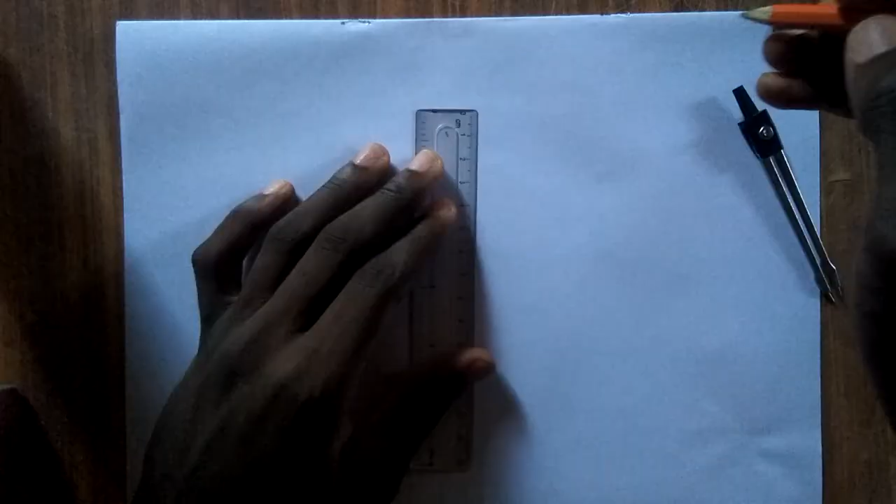So quickly, let's just say we're given a rectangle of size 6 and 11 centimeters respectively. We draw the major and minor axis from our horizontal and vertical components using 6 and 11 respectively.

First, draw a straight line, 6 centimeters, that's the vertical line. Locate the center of the line. Make sure your line is vertical upward. Then our next step is to draw 11 centimeters through it, so we have 5.5 at the middle.

We complete the rectangle after that. To complete it, we come to this side and draw a straight line of 6 centimeters. Note, you could also make use of a t-square to get a very accurate value, but since I'm a professional, I don't need to use the t-square, I can use my ruler. So now we're completing the rectangle.

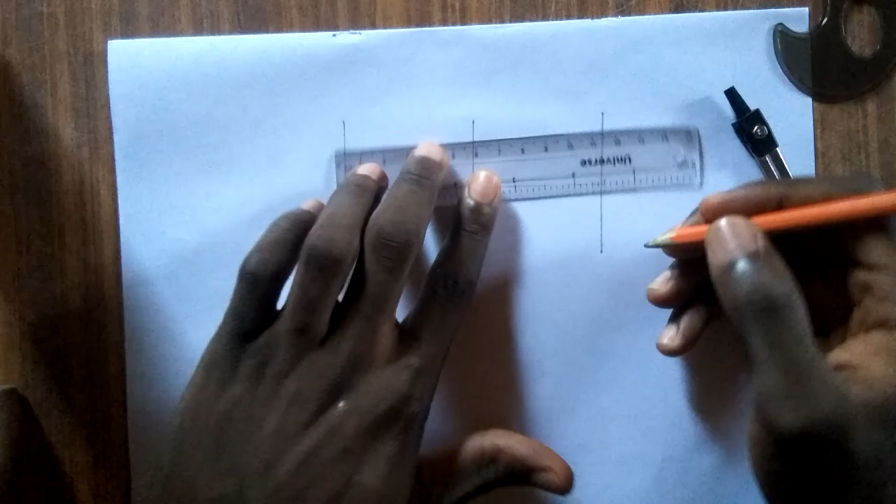So we are completing the rectangle, and we have this and also this.

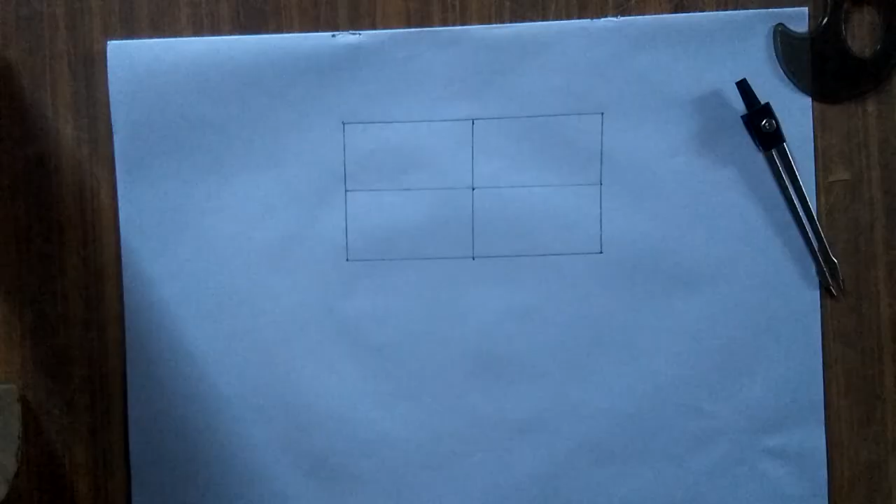Now that we have completed the rectangle, our next step is to call the first straight line AB and this upward line CD. We call the horizontal component AB and the vertical component CD. So we call this point E.

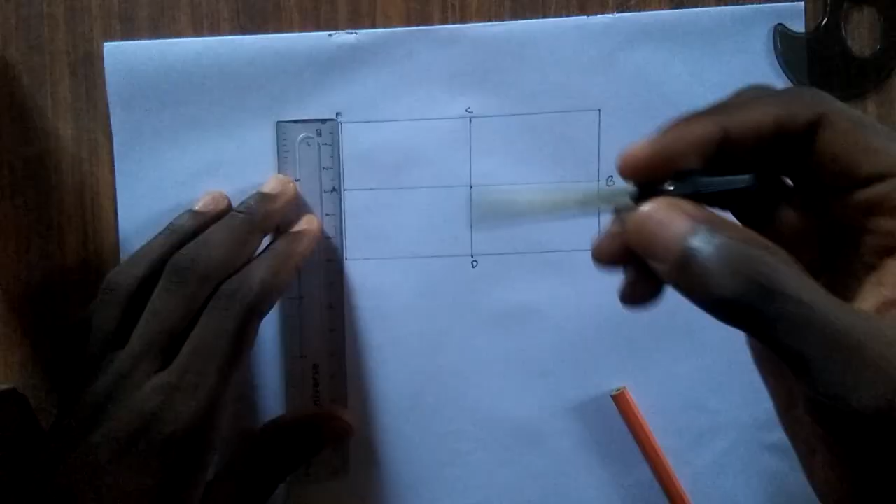After that, we now divide AE into a number of 4 equal parts. Since we know that EA is 3 centimeters, to divide it into 4 equal parts, each part will be around 0.7.

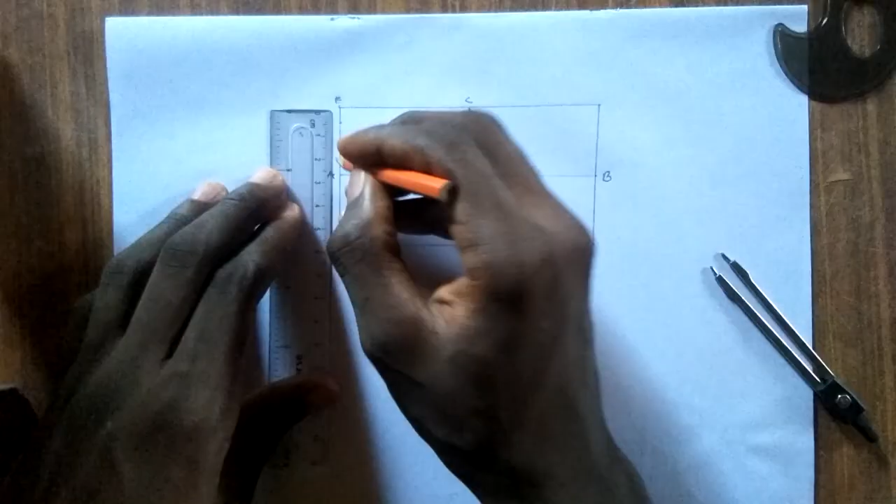We take 0.7 from our ruler and step it off 4 times on AE. So we have 1, now 2, adjusting it over here. So we have 1, and now we have 2, 3, and 4. Our 1 will be around here, then our 2 will be around there, and our 3 will be around there. After that, we number it 1, 2, and 3.

After that, we also call the center point where the vertical and horizontal components meet, center point O.

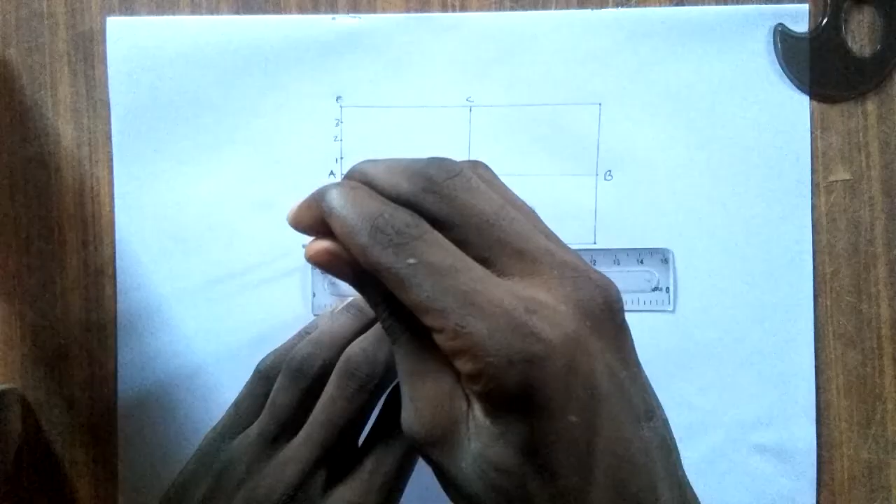Then we divide AO into a number of 4 equal parts. Since we know that AO is 5.5, each division will now be around 1.3, or 1.4 approximately.

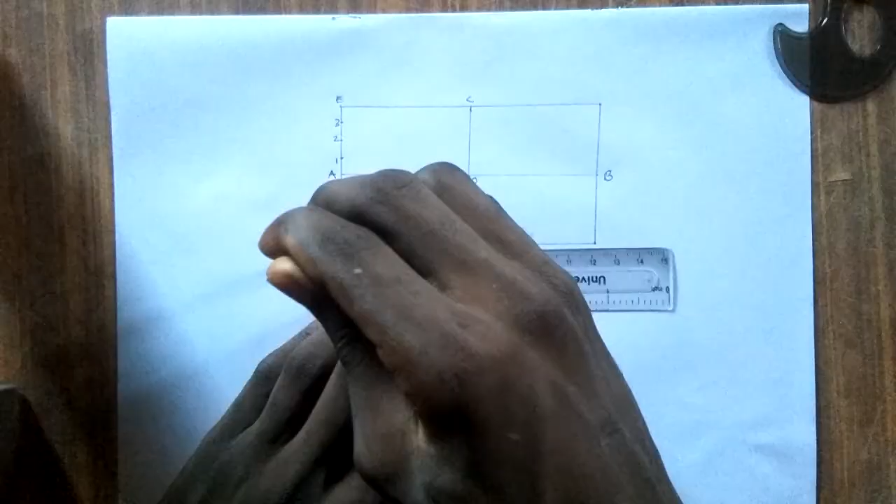So we take 1.4 from our ruler, and step it off 3 times. So we have 1, 2, and 3. We mark it 1, then 2, then 3.

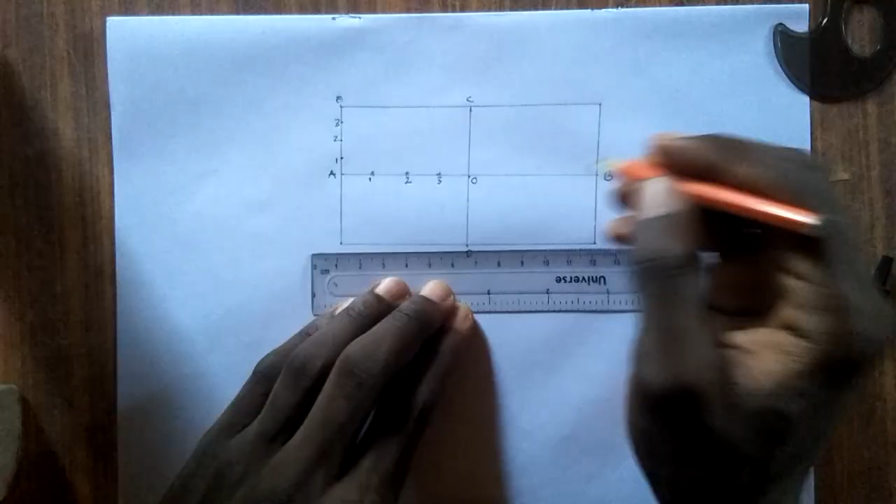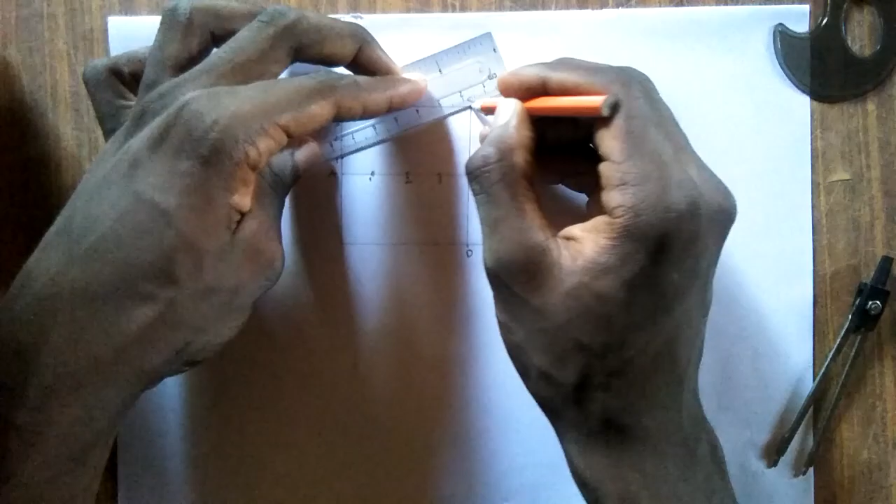After that, we now radiate lines from point C to 1, 2, 3 on AE. After we've already divided AE and AO, we radiate lines from C to 1, 2, 3 on AE.

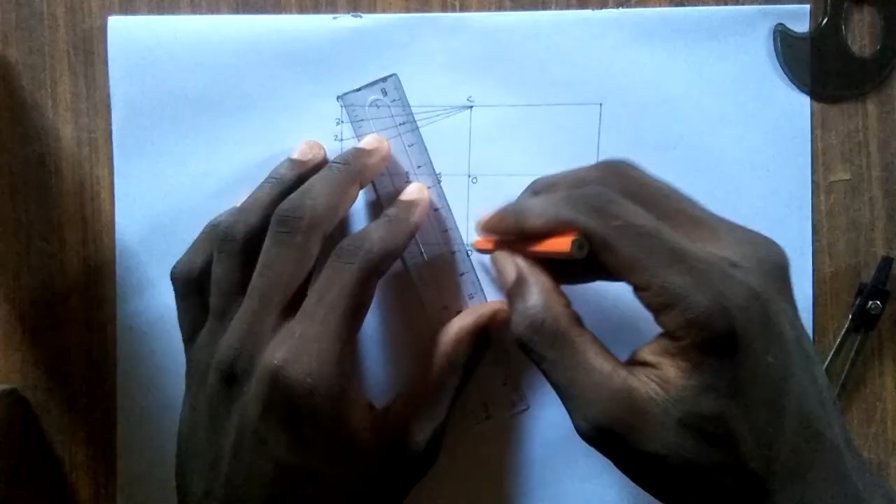After that, we also radiate lines from D through 1, 2, 3 on AO.

These lines are to pass through 1 to 3 on AO and touch the corresponding line from C. That is, a line drawn from D through point 3 will touch the corresponding line 3 drawn from C. This is the corresponding line 3.

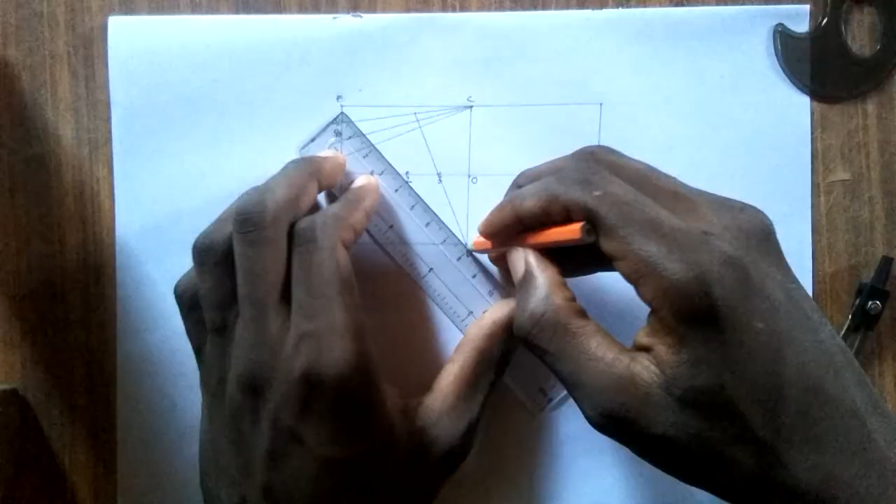The same thing is applicable to the other ones. A straight line drawn from D will pass through 2 and touch the corresponding line 2 drawn from C at this point.

A line drawn from D will pass through point 1 on AO and touch the line 1 from point C at this point. So these points are the curve points.

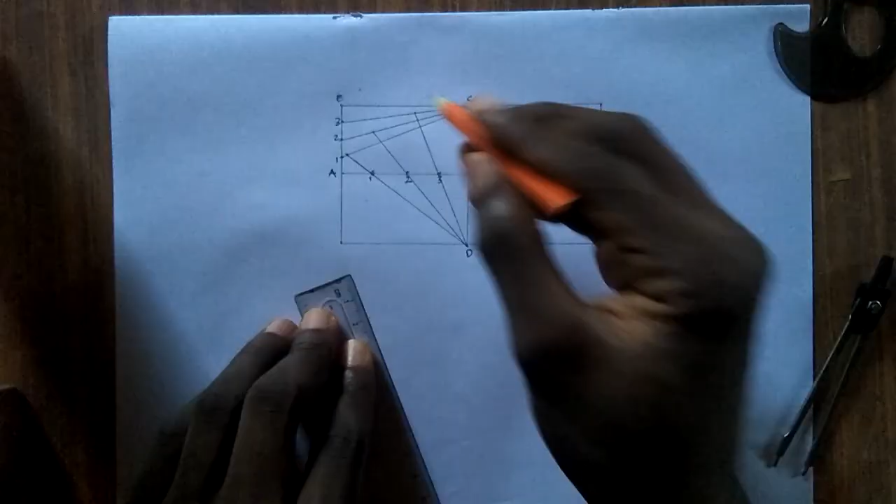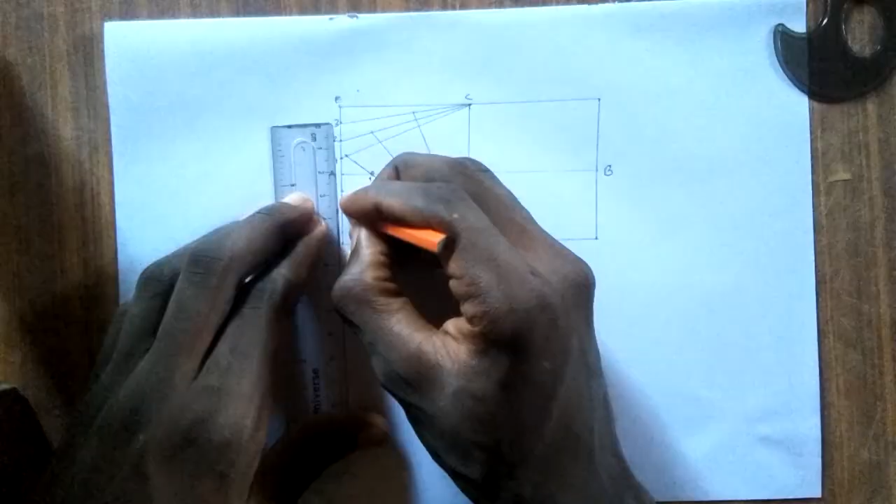The same method is applicable to the other three rectangles in the whole given rectangle. Rather than measuring it again, we take from here and step it off 4 times. We have 1, 2, then 3 and 4. So this will be our 1, this our 2, and this our 3.

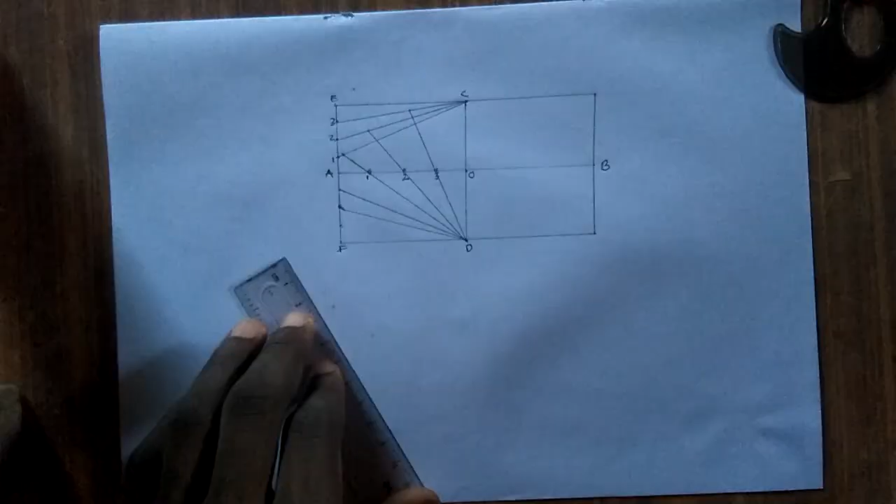So we radiate lines also from D to this point on A, which we call point F. We now radiate lines from point D to each point on AF, from D to each point on AF. So we have this, now followed by this.

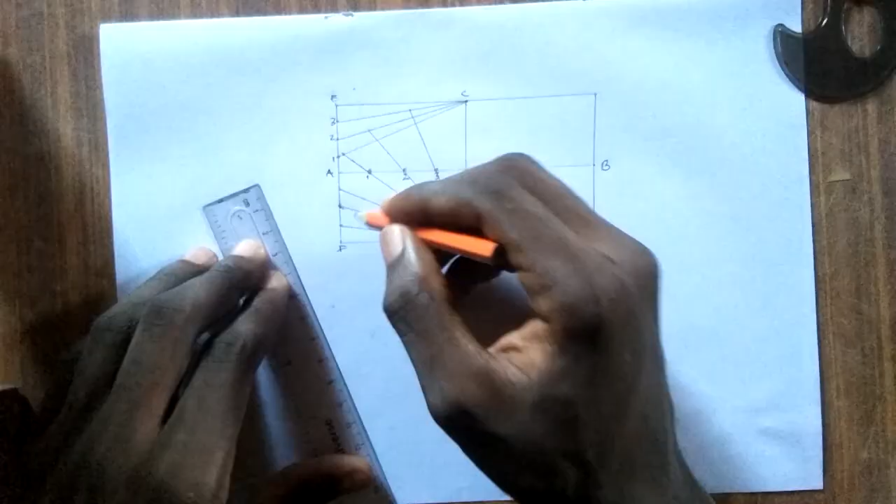After radiating lines from each point from D to each point on AF, we now also radiate lines from C to pass through 1, 2, 3 on AO, and touch the corresponding line.

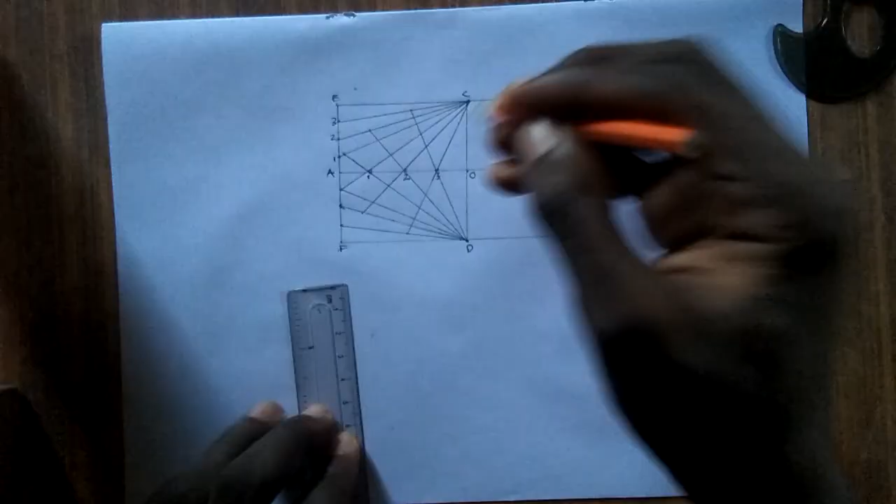This line drawn from C will pass through 3 and touch the corresponding line at this point. Mark the point. Then this line drawn from C will pass through 2 and touch this corresponding line at this point. Then another line drawn from C will also pass through point 1 and touch this corresponding line at this point. So these are the curve points for the ellipse.

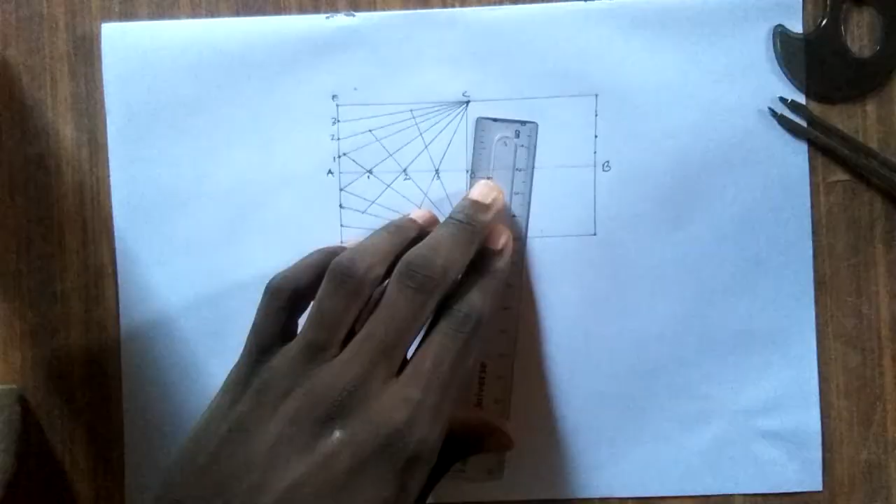The same thing is applicable to the other 2 remaining rectangles. We take from our divider and step it off. So we have 1, then we now have 2 and 3. Mark it 1, then mark this 2, then mark this 3. Don't confuse it.

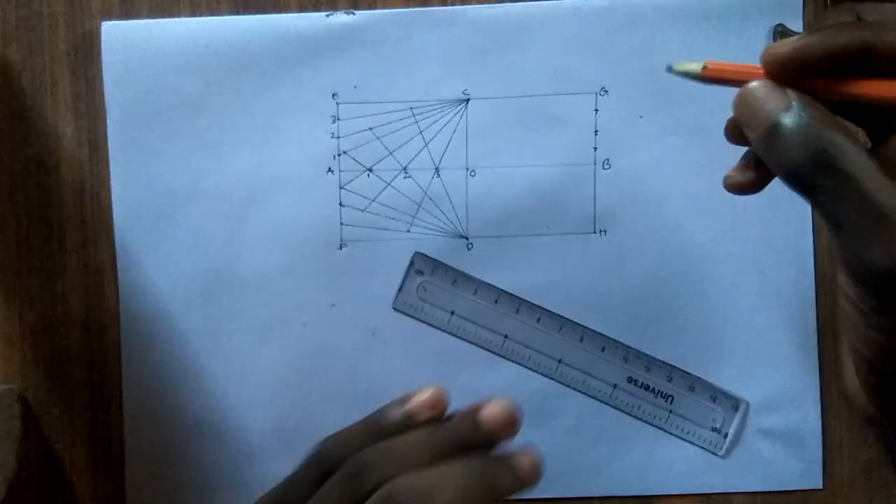After that, also divide BG. You can call this GH - A, B, C, D, E, F, then GH. After that, we now take from this side and step it off on OB.

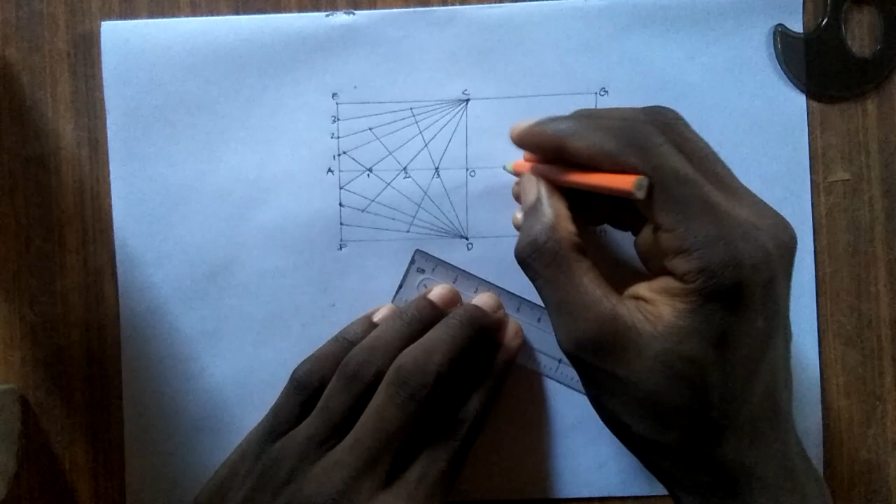So divide it into a number of 4 equal parts. After we divide OB into 4 equal parts, let's divide it first. So we have this 1, and now have this 2 and 3. Since we've divided OB into 4 equal parts, we apply the same method.

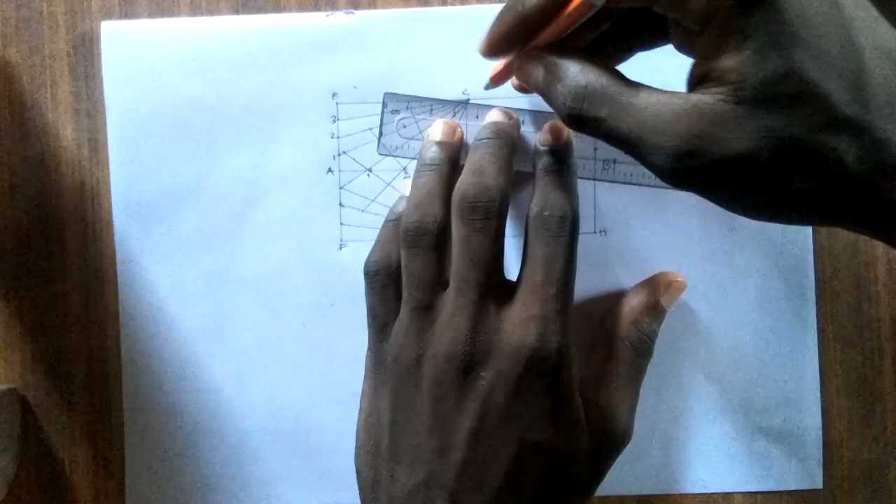Radiate lines from C to each point on BG.

After that, we now radiate lines from D through each point on OB to touch the corresponding lines. Radiate lines from point D to pass through this point and touch the corresponding line at this point. Then radiate another line from D to pass through this point and touch the corresponding line at this point.

Then radiate one more line from D through this point, touching the third line from C at this point. So these are the curve points. After that, we apply the same thing for BH.

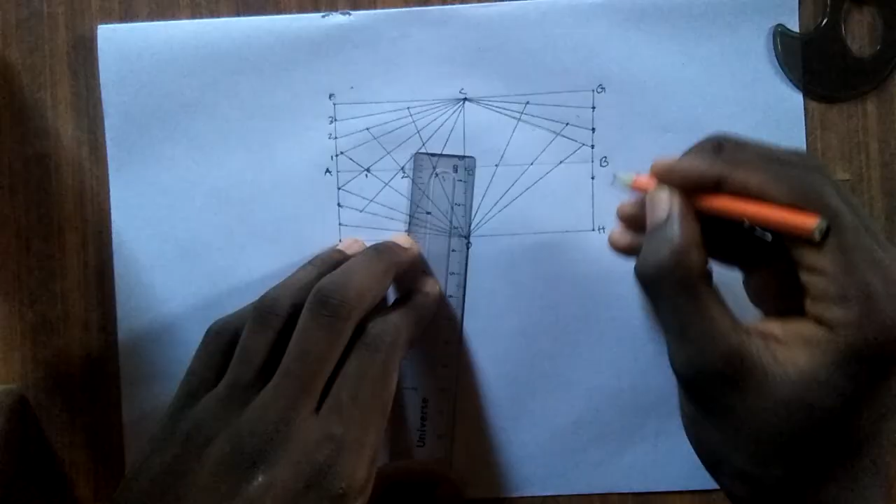We take from our divider and divide BH into a number of 4 equal parts. We have 1, we now have 2, 3, 4.

After that, we radiate lines from D to each point on BH. Then we radiate lines from C through each point on OB.

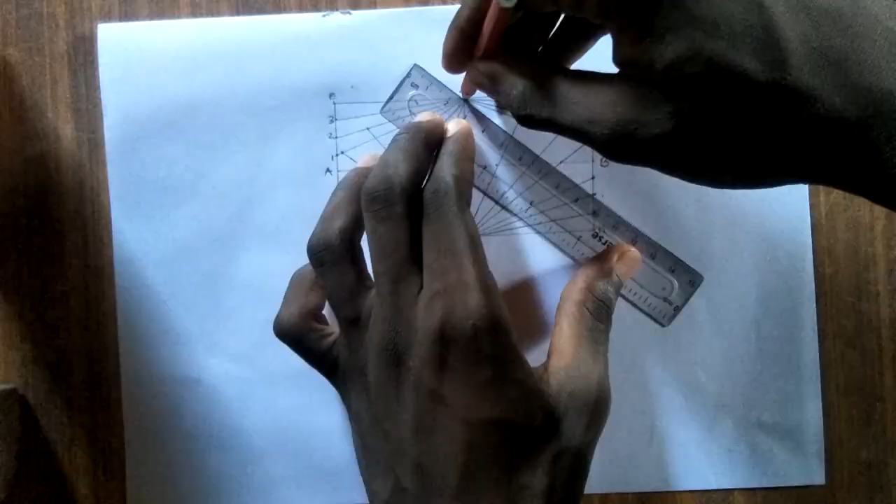This line from C is to touch the corresponding line at this point. That line radiated from C also passes through this point and touches the corresponding second line drawn from D at this point. Then the third line from C also passes through this point and touches the corresponding third line at this point. So these are the curve points.

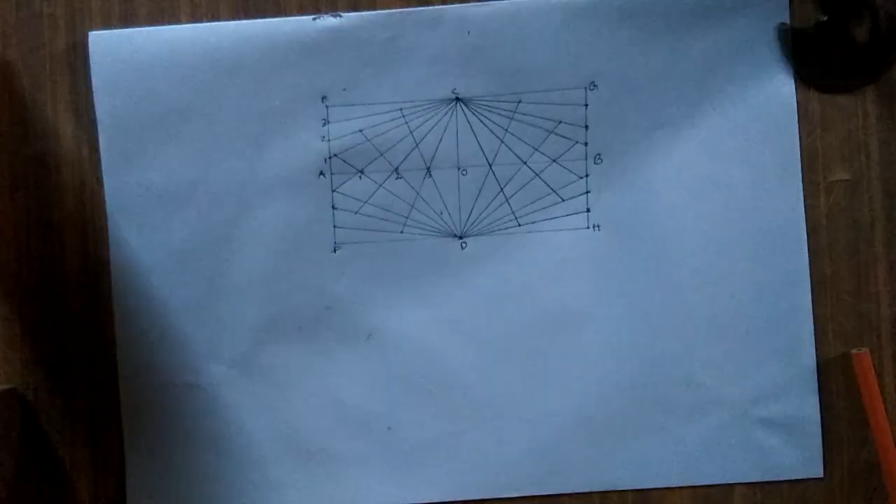So finally, to complete our ellipse, we now take our French curve and join each point which are the curve points. Note, this is the most important part, and this is the beauty of today's work. Our curve must be perfect, which means it must stay on each line.

We stand our point here, then we move our French curve closer to this point, not touching this point. Then you can see it's going to land on it. The other one is to start from here, and we draw our curve, pushing our French curve not to touch the second point, but to touch this first point.

So we have this. As you can see, here I'm drawing my ellipse. We should also apply the same thing too. So after that, we now have this.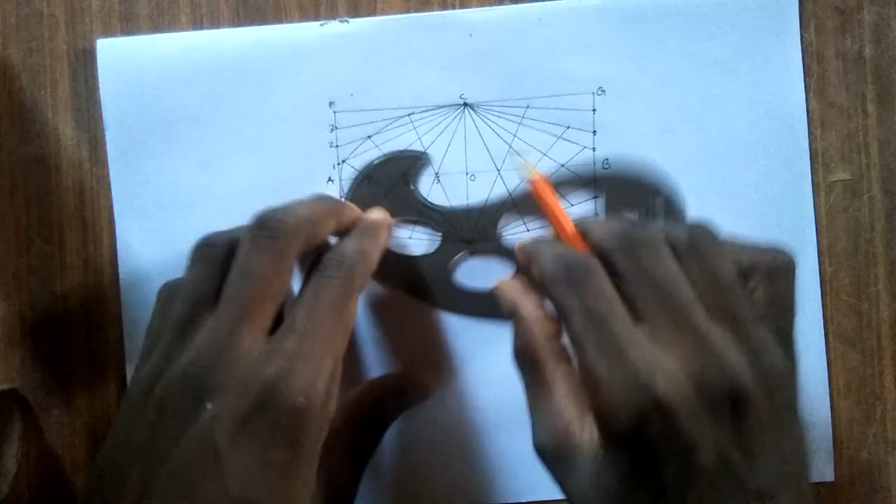We'll leave that, come back to that. So from here, we have this.

Make sure you have a perfect curve. Without having a perfect curve, is a 0 for you.

So we're joining the points together by using our French curve. Note, your ellipse must be perfect. Without getting it perfect, is a 0 for you in your institution or any learning level. So you must be careful here with the curve.

Almost there. Just take a deep breath and calm down, it's very easy. You have this, and finally this. So these are the steps in drawing an ellipse by the rectangular method.